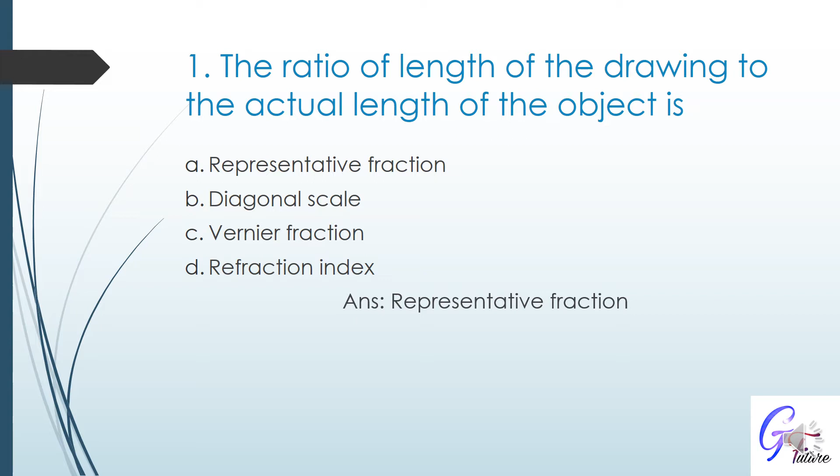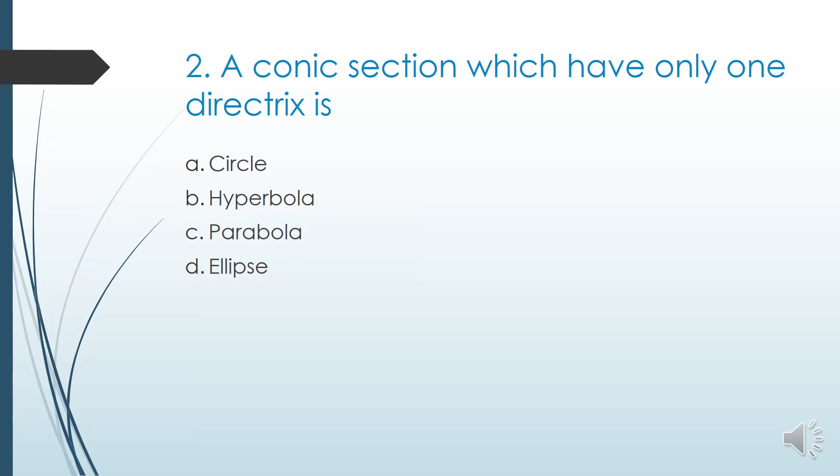A conic section which has only one directrix: circle, hyperbola, parabola, ellipse. Our answer is parabola. Next question, let's go.

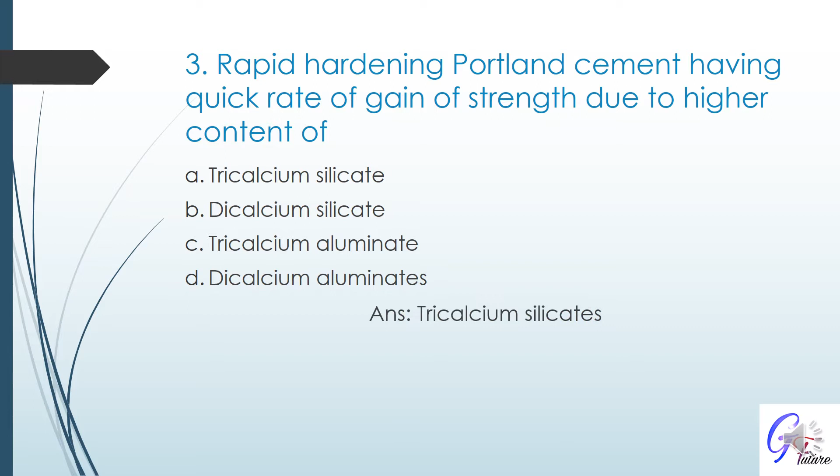Rapid hardening Portland cement has a quick rate of gain of strength due to higher content of tricalcium silicate, dicalcium silicate, tricalcium aluminate, or dicalcium aluminate. Our answer is tricalcium silicate. Next question, let's go.

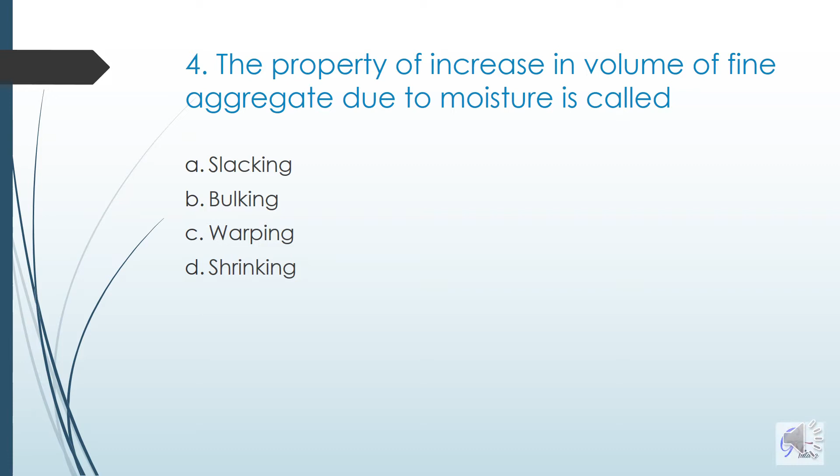The property of increase in volume of fine aggregate due to moisture is called slacking, bulking, warping, or shrinking. Our answer is bulking. Next question, let's go.

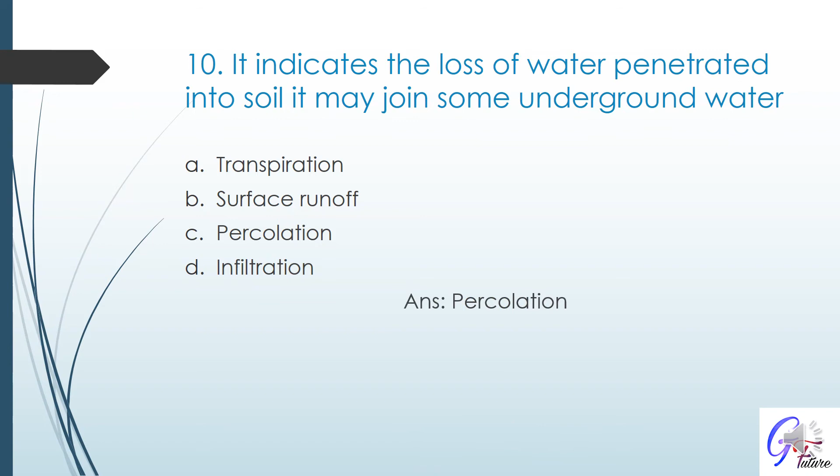Next question: for potable water, the amount of chloride should not exceed 225 ppm, 275 ppm, 150 ppm, or 250 ppm. Our answer is 250 ppm.

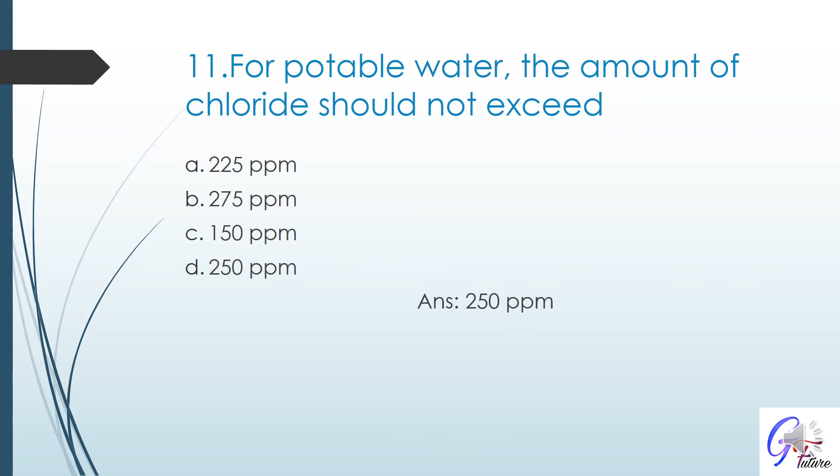Next question: the theoretical time taken by a particle of water to pass between entry and exit of a settling tank is known as detention period, settling period, period of penetration, or falling period. Our answer is detention period.

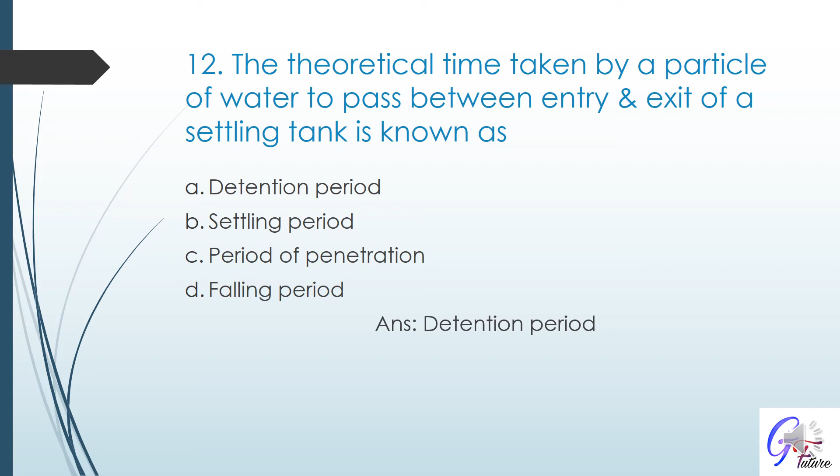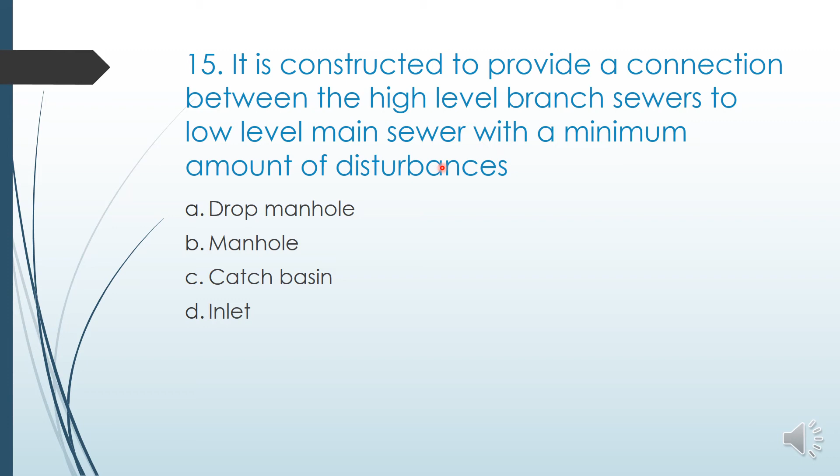Next question: it is constructed to provide a connection between high-level branch sewers to low-level main sewers with a minimum amount of disturbance. Drop manhole, manhole, catch basin, or inlet. Our answer is drop manhole.

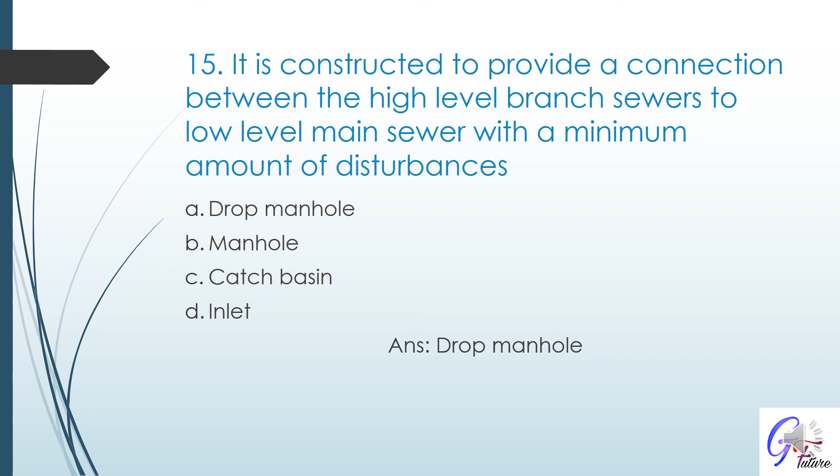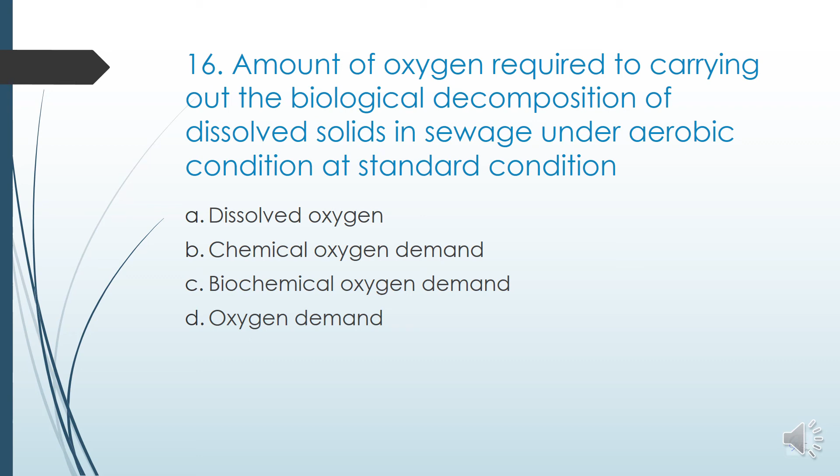Let's move to the next question. Amount of oxygen required to carry out the biological decomposition of dissolved solids in sewage under aerobic condition at standard condition: dissolved oxygen, chemical oxygen demand, biochemical oxygen demand, or oxygen demand. Our answer is biochemical oxygen demand.

Next question: the term used to indicate the sludge which is obtained by settling sewage in presence of abundant oxygen. Activated sludge, aeration, diffusers, or mechanical aeration. Our answer is activated sludge.

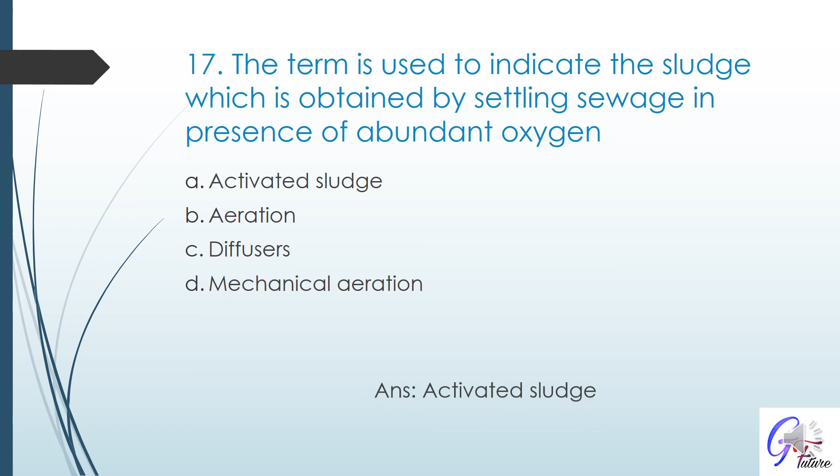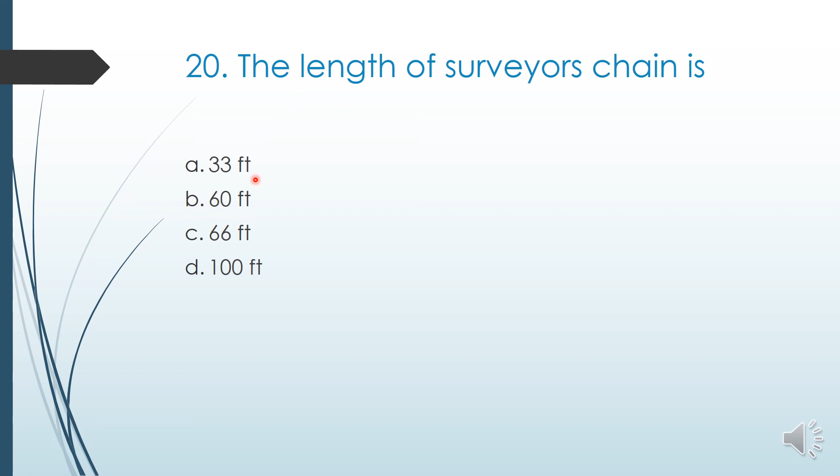Next is the last question of this video, let's move to that. The length of surveyor's chain: 33 feet, 60 feet, 66 feet, or 100 feet. Answer is 66 feet. 100 feet is the length of an engineer's chain.